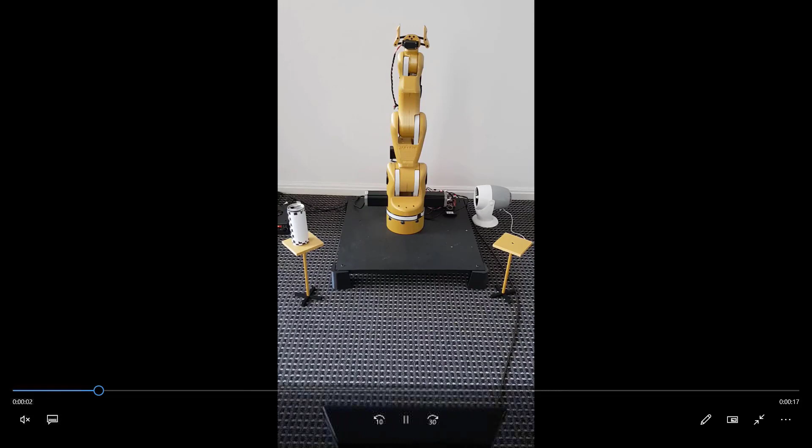I think it's fair to assume that something like that may have required some previous robotics knowledge or experience, or that the robot may have cost a fair bit to put together. Commercial robotic arms these days usually start at about $10,000 US and work their way up from there. Interestingly enough, neither of these was actually the case. I was able to put together this robot with no previous robotics knowledge or experience, and it cost somewhere between $500 to $600 to build. All of the parts you saw in the video are printed on a home $200 3D printer, and including the motors and some of the drivers, the whole thing costs somewhere between $500 to $600 to build.

Now, all of this came about after asking one very simple question: how hard can it possibly be? For those of you watching that consider yourselves builders, you might be familiar with this phrase. I know that I certainly am. The cloud and the open source community have really opened up the portfolio of technologies that were previously unavailable to developers, and as a result, with the number of options available and the wealth of information online, it's hard not to underestimate the difficulty of leveraging emerging technologies.

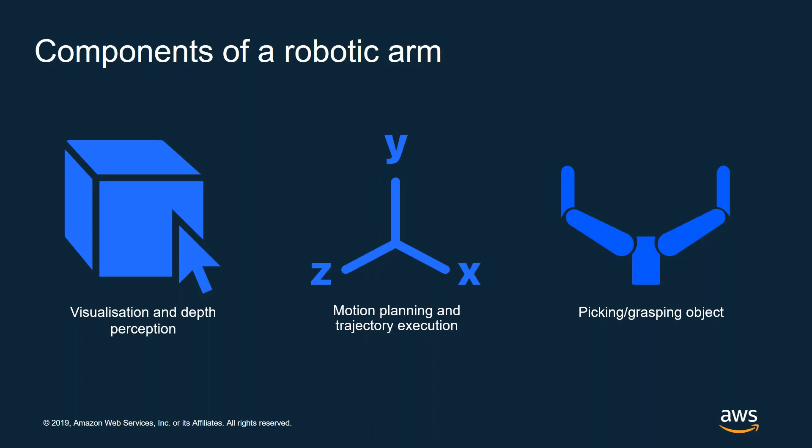The first thing we need to do is visualize our robot. We need to build a virtual representation of it so we can use it in simulations. To do this, we use what's called a unified robot description format, which is essentially an XML file where we dictate the parts of our robot, the mass of each part, how those parts hang together, whether they're fixed joints or mobile joints, even things like sensors.

In our Robomaker IDE, we can put together this XML file, which we would then deploy into our robot visualization tool, called RViz. It's a managed component of AWS Robomaker, and it allows us to view our robot in 3D, where we can see it at all angles. We can make sure it moves correctly, and we can even assess things like whether the sensors are working correctly.

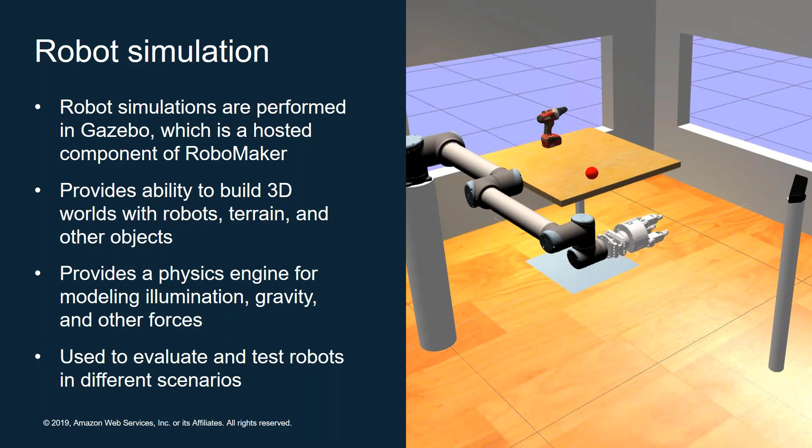Now, there are some robotic projects where simulations are absolutely critical due to certain physics properties that can't be emulated here on Earth. So if you ever think about what NASA JPL do, for instance, NASA's Jet Propulsion Laboratory is a US leading center for robotic exploration of the solar system. They essentially create robots like the Mars rover that operate in completely different physics environments. As a result, they need to use simulations to be able to replicate those environment parameters.

So now that we've created that virtual representation of our robot arm and can spawn it into a simulation to perform some testing, we need to provide the robot with some level of capability. To begin with, we need to recognize objects that we potentially want to pick up and move. We could use Amazon Rekognition capability within our robotic application, which would provide our robot with image or object recognition without needing that machine learning background or experience. We can run that capability in the cloud, which means we don't need to cater for the hardware footprint required on our robot. We can offload the resources required to AWS, and as a result, have a smaller hardware footprint for resource-intensive tasks.

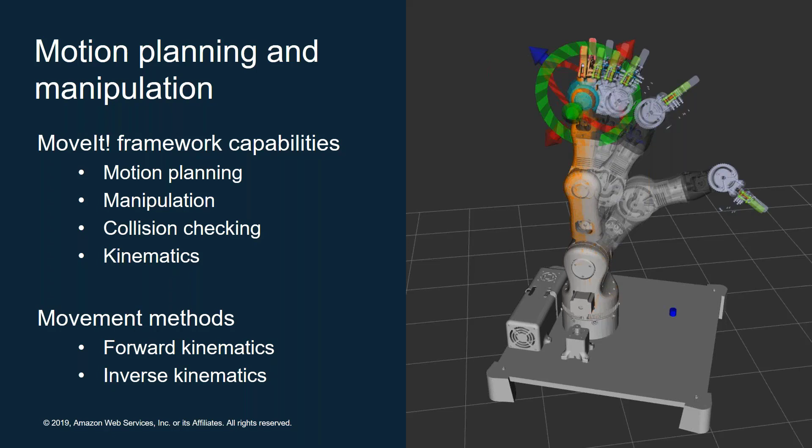Essentially, once we've tested out our robotic application, we can then use AWS RoboMaker's fleet management capability to deploy our robotic application to our hardware over the air. We register our robotic hardware to the fleet management capability, and we assign its endpoint to a robotic fleet where we might have more than one robot specified. Then we can push down updates or deployments to our hardware.

If you're familiar with AWS's IoT offerings and services, the fleet management capability provided out of AWS RoboMaker actually uses AWS's Greengrass over-the-air update mechanism.

So what we'll do now is we'll actually switch over to a demonstration. I'll just load up the screens from RoboMaker that I've preloaded here.

So what you can see here is a robotic application that's been launched into a simulation. And what we have here is basically 4 screens. These 4 screens represent 4 of the managed capabilities that RoboMaker provides. So the top 2 we've already talked about.

In the top left-hand corner, we've got Gazebo, which is the managed simulation. And what you can see is a robot arm that looks pretty much identical to the one that we saw earlier in the demo at the beginning of the presentation. This is actually an open source robot arm called the BCN3D Moveo that was created to provide an educational platform for engineering students to use as a cost-effective platform to learn on. The bill of materials as well as the 3D printable parts can be downloaded and used in your own projects.

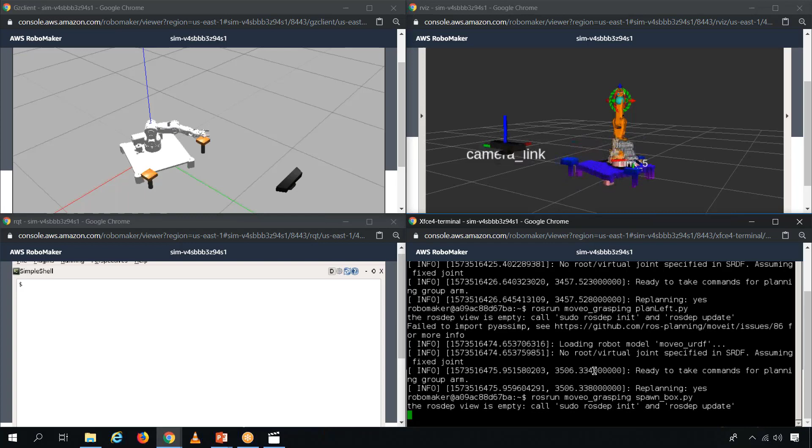You can see there's a wooden box that's appeared out of nowhere between those two stands in Gazebo, sort of sitting on top of the base of the robot arm, and the depth sensor has actually picked it up. You can see in RViz that it's created that octomap of what it can see. It can't see the sides of the box, hence it hasn't created the sides of the box there, but it can see the front and the top of it.

So obviously if we were to execute the previous plan, that's not going to quite work because there's a box now in the middle. Unless we want to smash right through it, we're not going to be able to execute that movement. So let's do another plan and see what happens.

So we've executed the exact same script as before. No extra code was required. And we can see that it's actually detected that there's an object in the way, specifically the box, and it's replanned to accommodate that collision object.

So what we can actually do now is move the arm to the left, and what we should see is it go up and over that box. And it does so. This gives us the ability to avoid that collision object, which is pretty handy, without having to change any code at all.

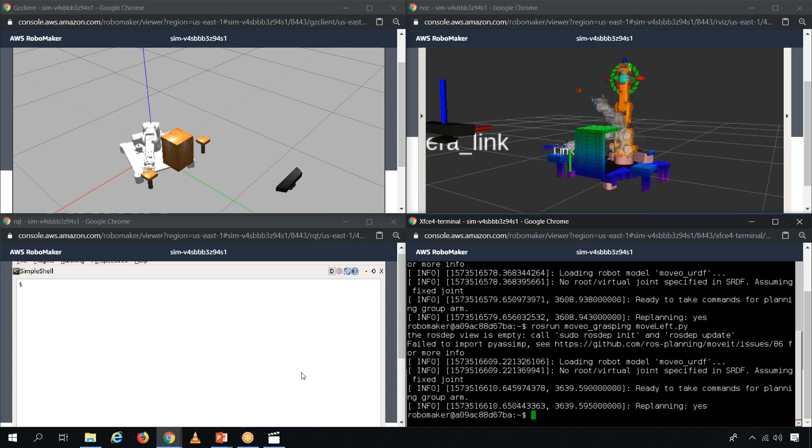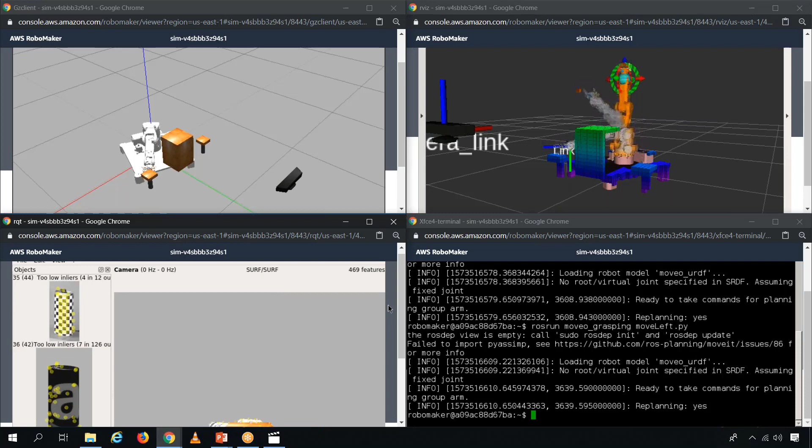So what we're going to do now in the simulation is launch our object recognition tool. You can see on the bottom left-hand side, just launching another window. Okay, so on the bottom left-hand corner, you can now see what the depth sensor can see.

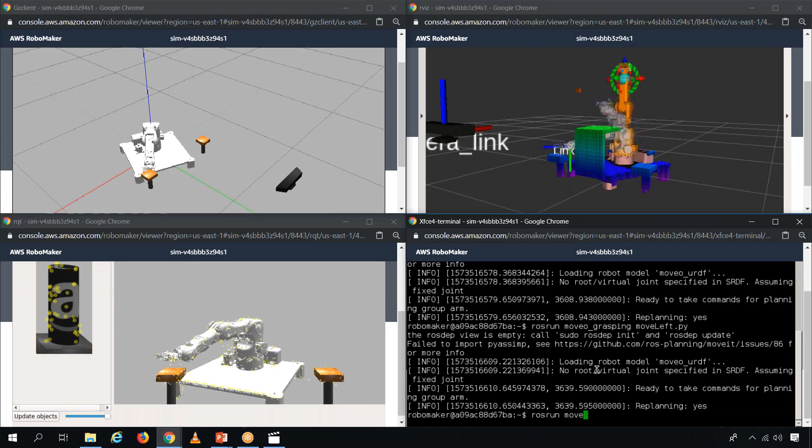It's looking straight on at our robot with the box in the middle. What we'll do now is actually delete this box here, and we'll spawn a can.

So you can see that there's a can that's dropped out of the sky. It actually has the Amazon logo on it, and you can see that it's landed on one of the stands. It's additionally recognized that object. You can see that there's a red square drawn around that object, and it correlates the picture that it can see, specifically that Amazon logo. Oh, there it goes, it's recognized it again.

It seems to be faintly recognizing it, but basically what it's done is it's been able to detect a can that's landed on the stand with the Amazon A on it. As you can see on the left-hand side of the screen, we've got a picture of that can as well, so it's been able to detect that. It's object 36. Then in RViz you can see that it's actually detected that object 36 and that it's sitting on top of the stand. So it's been able to detect the object and determine where it is within the 3D coordinates. Now we can essentially use those 3D coordinates to be able to pick up the can.

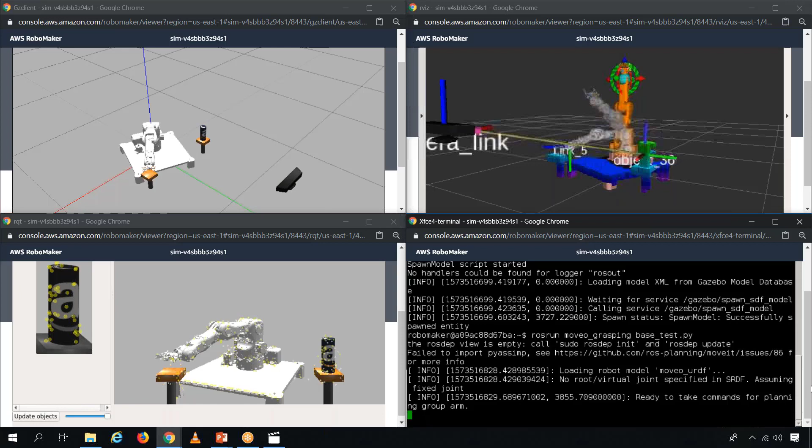So with that invoked, we should see this octomap, which is the collision object here, disappear. And we'll see a manipulation object instead, which you can see. It's basically a green bar, which is exactly where object 36 is. And we've got some movement.

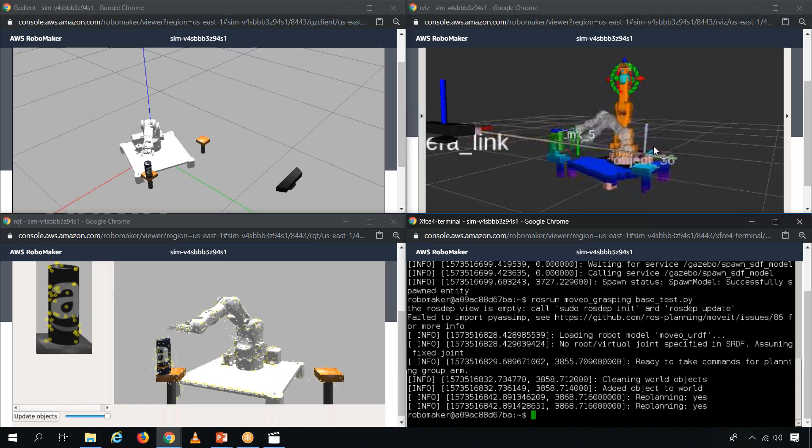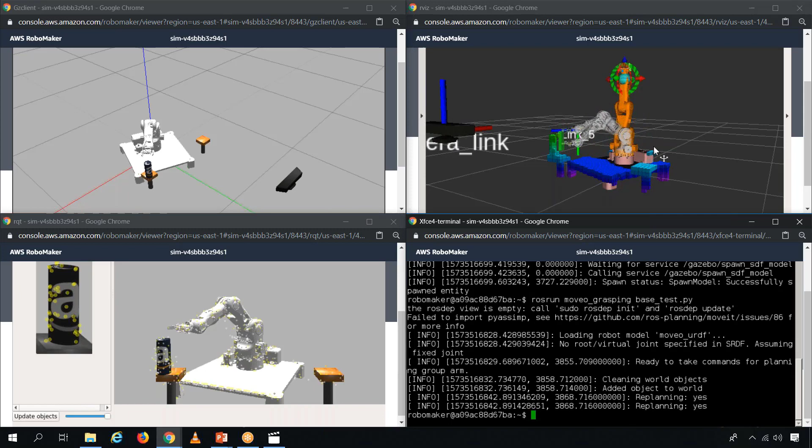Interestingly here, you can actually see that the can was slipping out of the robot gripper's hand a bit due to that movement as it whipped it around. These are the sorts of intricacies that you can work on in Gazebo. You can dictate things like friction, inertia, or mass, which could all potentially affect your ability to move an object from one location to another in a rotational movement. But as you can see, it's been able to pick up the can and move it to another location.

So what we'll do is take a quick look at what that looks like in the physical simulation. Now, before I play this, this is a recording of the physical robot, the one that we saw at the beginning of the presentation. But what we've done is we've deployed the exact same code to the physical robot.

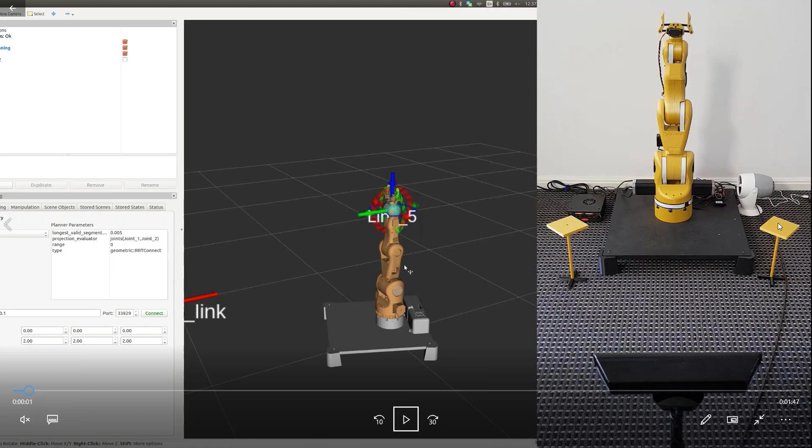Now, the way it works is we've got some stepper motors that are actuating the joints in the robot arm. And with ROS, it publishes those joint angles for each of the joints, and we've created a driver that's able to convert those joint angles to the number of steps these stepper motors need to take to reach that joint angle. For the motors in this robot arm, for those five joints, there's usually about 200 steps per revolution of the motor, and you can break down those movements to a 16th of a step. So you could do some very fine movements with these stepper motors, which is why they're used in things like 3D printing. That's essentially the way it interacts with ROS.

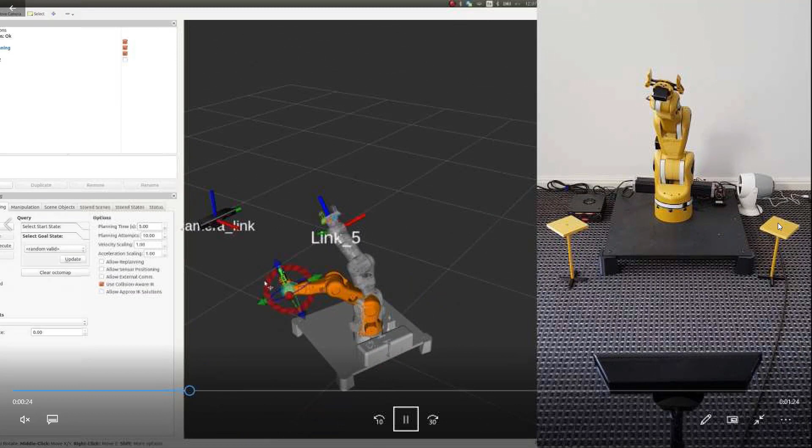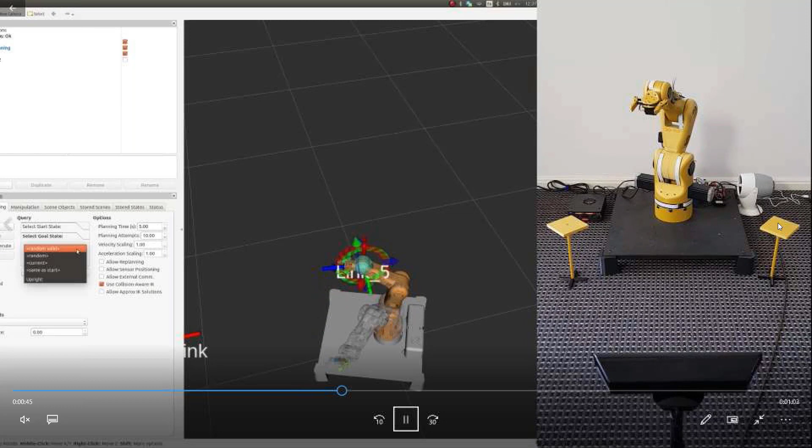So what you can see here, admittedly, part of the screen is cut off on the far left, just because of screen real estate. But what we're doing here is we're now moving that marker around because we've got a bit more space for the gripper. So we can move the robot around to different poses, and then plan and execute those movements for the physical robot arm. This allows us to ensure that the driver is working correctly and that our algorithm that converts those joint angles to the number of steps required is spot on. So you can see we're doing a number of different poses there, and we're moving it back to its original default state.

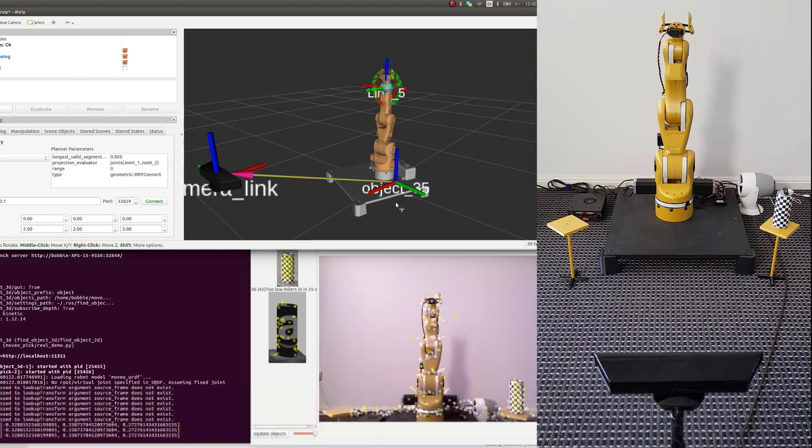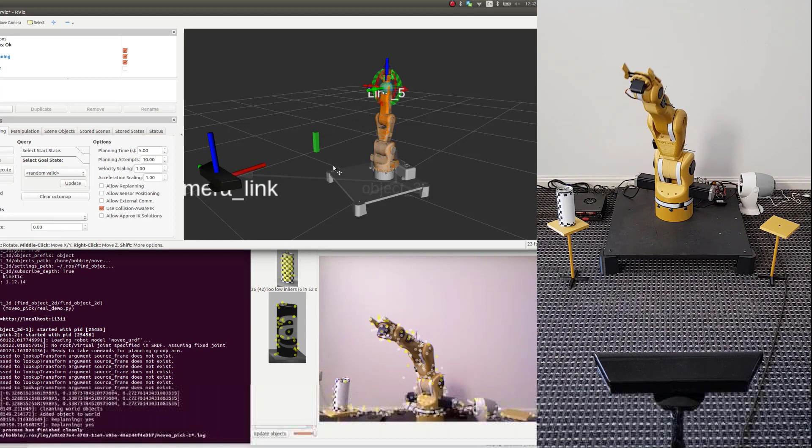Now what we're doing here, you'll see some familiar screens as before. You've got RViz in the top left-hand corner, and the physical robot in the bottom right, which replaces Gazebo. But then also, you can see to the bottom left and bottom center, both an area to run scripts, as well as the object recognition capability, or what the depth sensor can see. You can see that it's recognized object 35, which is the can. It's determined its specific location within the XYZ coordinates. And then the robot arm has been able to navigate to that location, grasp the object, place it on the other stand, and then return back to its default position.

So that gives you an idea of how you're able to use pretty much the same code to execute the same sorts of movements and testing, both in a simulation and then deploy that to a physical piece of hardware and have the exact same results.

So hopefully those demonstrations provide a bit of an understanding of some of the benefits of using AWS RoboMaker for robotic innovation and development. Probably the most important benefit for myself, or for anyone beginning this journey, is around low-cost robotics innovation. The fact that you can use the platform to simply get started, dip your feet in the water, and determine whether this is something you're going to be able to do or not, in a pay-as-you-go fashion, will allow you to build up the confidence to potentially put down some money for robotic hardware.

Another benefit is the ability to run safe simulations in multiple scenarios before deploying your robotic application to hardware.

For some members of my family, they found this probably more important. The thing with the robot arm that I built is that it's about 10 times the size of that toy robotic arm that I initially bought, and probably about 10 times as powerful. So the good news is that it didn't cause any harm to any more furniture because I was able to